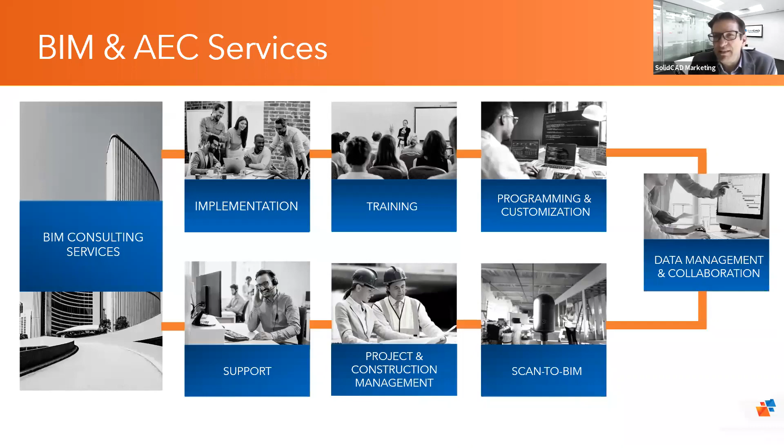Recently we've been awarded, and we're really proud about that, to be named by Autodesk as top service partner—not in Canada, not in North America, but worldwide. We're trying to do our best to offer you the best services you can have, and we also support our solutions, so we're there to help if you have any needs or problems using the product.

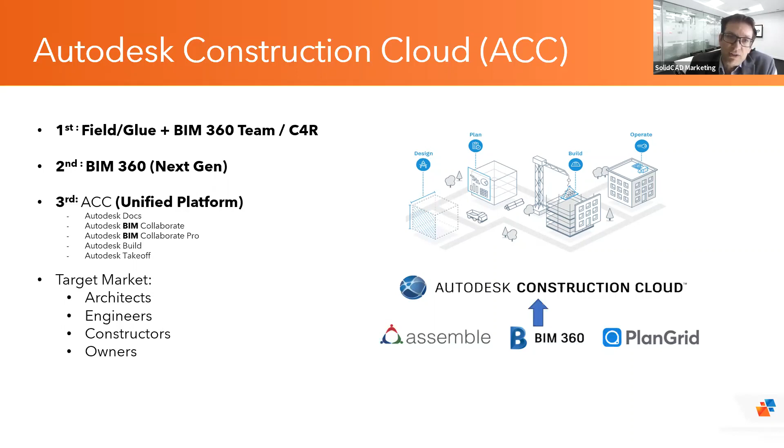So you had BIM 360 Design, which a lot of people know and use, Coordination, BIM 360 Docs, and also BIM 360 Build. That was a great product, however most people found it a little hard to use. That's why today you have a new platform that integrates other technologies Autodesk purchased approximately 2 years ago, an investment of a few billion dollars.

They acquired Assemble and also PlanGrid, and merged those technologies inside one platform they now call Autodesk Construction Cloud, or ACC. Today I'm going to talk about Autodesk Docs, BIM Collaborate, Collaborate Pro, Build, and also Takeoff. Docs is the same as BIM 360 Docs. Collaborate and Collaborate Pro are like BIM 360 Design and Coordinate. Previously we were very present in the target market of architects and engineers, but now we have a very good solution for constructors and also for building owners.

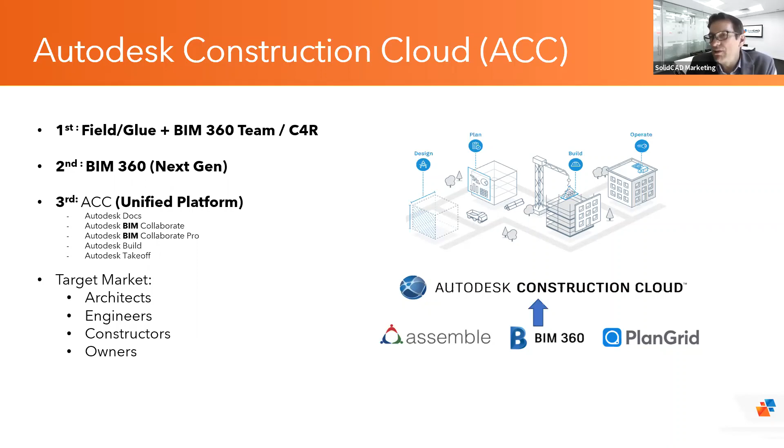Some changes happened in February: if you subscribe to an AEC collection, you now have access to both BIM 360 Docs and Autodesk Docs. It's free of charge, included, and you can use it right now. And if you were a BIM 360 Design subscriber, it now includes Coordinate free of charge—usually it used to be an optional solution.

Also, if you have not noticed and not used those solutions, we do have an integration with Revit and also Navisworks. I'll cover the features that you have with issues that will be widely used inside of the platform, but there's an integration where you create an issue inside of the platform where you can connect inside of Navisworks and connect inside of Revit.

For those who are not aware, if you're using BIM 360 Design or now Collaborate Pro, it's the environment where you work on the project inside of Revit, and everything that you save is automatically published inside of the cloud and then accessible to other stakeholders or other people working on the project who do not use Revit or maybe Navisworks. The same goes with Navisworks, where you can retrieve the project and do more analysis, clash analysis, and have access to more tools than what you can get in the cloud, but those two solutions work all together.

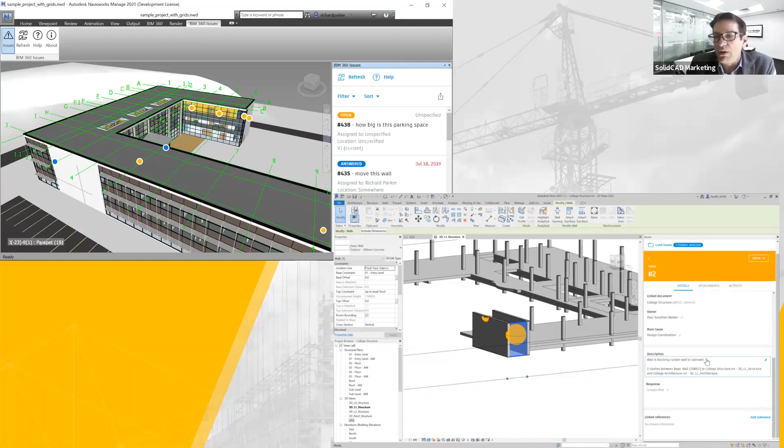So today I'll spend most of my time talking about project management, quality, and safety. I'll cover RFIs, submittals, meetings, all the aspects of a punch list and accessibility of information in the field. Also cover doc controlling, versioning, and approval.

There is inside of Build another module which is called cost management. That would take a little bit too much time today to cover because we would need at least 1 hour. We don't have that today, but stay tuned. There will probably be other seminars soon to cover this aspect.

So why use Docs? Docs is to avoid information in silos. Everyone is using great products—could be emails, could be PDF, could be a tool to view Revit files or use Revit files with Revit. All great tools, but they are all disconnected.

Using products such as Docs will help you create what we call a CDE, a common data environment, where all the information that you want for your project resides, and you create a structure where everyone you want to have access to the data can have access to it, can view the documentation. If it's a 2D model, a 3D model, a PDF, an Office document, you can view all of that information, and you always have access to the latest version.

One question I get very often is, can I control that data? Yes, you can download the information, and there's a free tool called the desktop connector that can help you synchronize the data to another desktop—it could be your server or anything else.

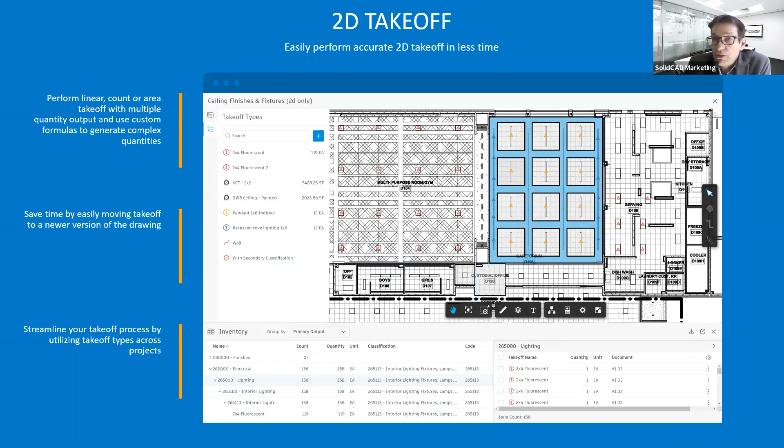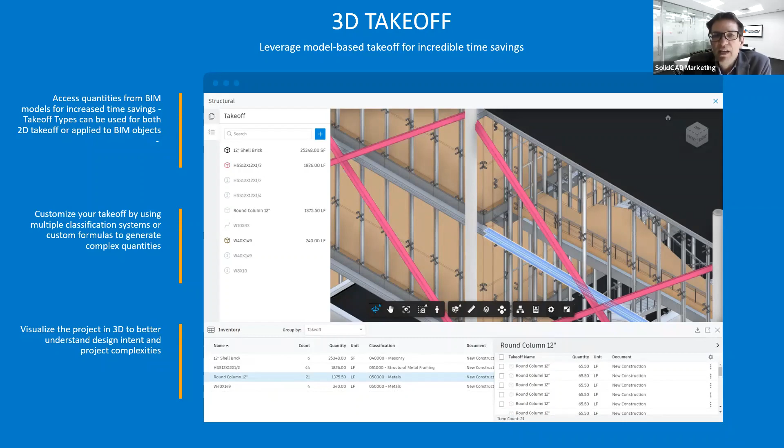We don't have enough time today to review the solution, but if you have some estimators, this is a great tool to do 2D and 3D takeoff. You can use the tool to take a 2D model, a 2D file, extract all the data and do your estimation—that's a great tool for doing that. You can also do this on a 3D model, so as people are working on the project inside of Revit, you can do your estimation at the same time and retrieve all the information of the quantity and get the pricing of the item that you need or the right length. You can use mathematical equations to extract the data and get reports. So stay tuned, there will be another presentation soon about that.

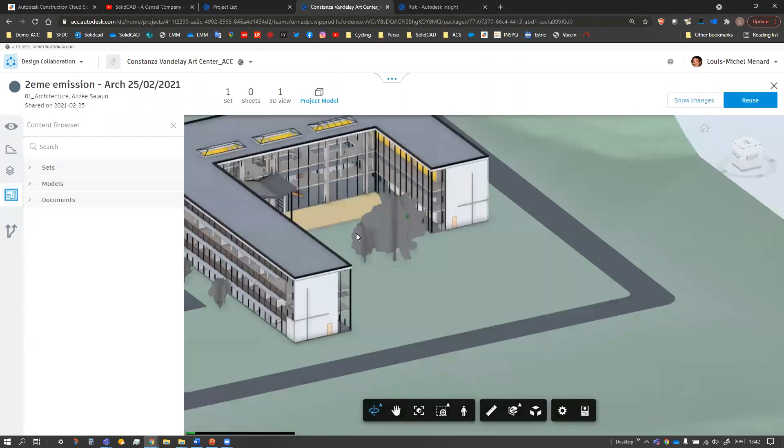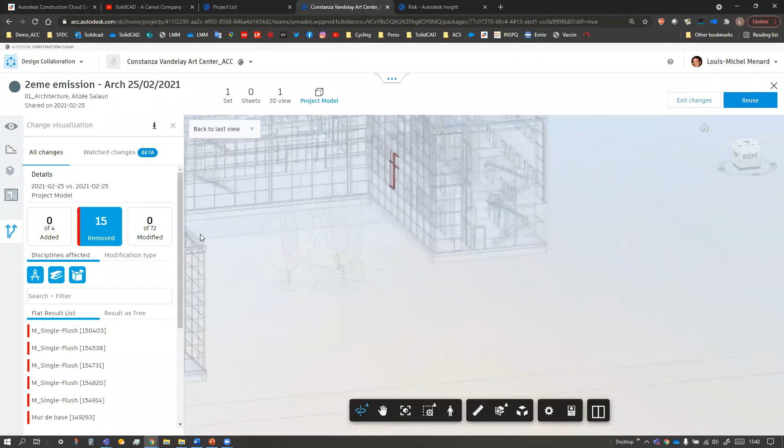Before accepting, I ask, show me the different changes, and then I can review those changes. So I just want to remove those and show you what has been added. You can see in green what has been added, what has been removed. I don't want to spend too much time on whether it's good or not, but just want to show you the type of work people who will analyze this will do. So let's say everything is fine with me.

I click reuse, and then this information becomes available inside of Docs, and it's available to all the other stakeholders and participants inside of a project. So you see that folder called BIM collaboration. You recognize those 4 disciplines. So under architecture, I'll find the model that we were reviewing.

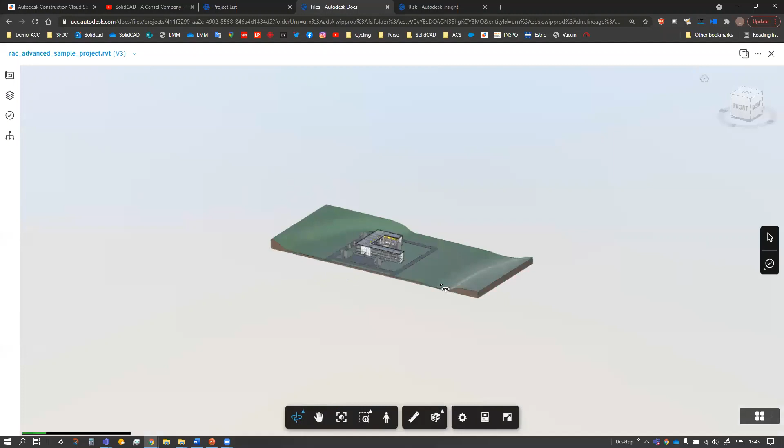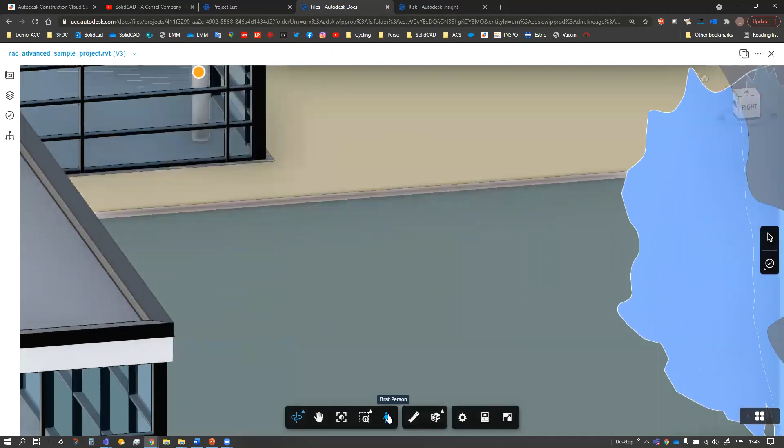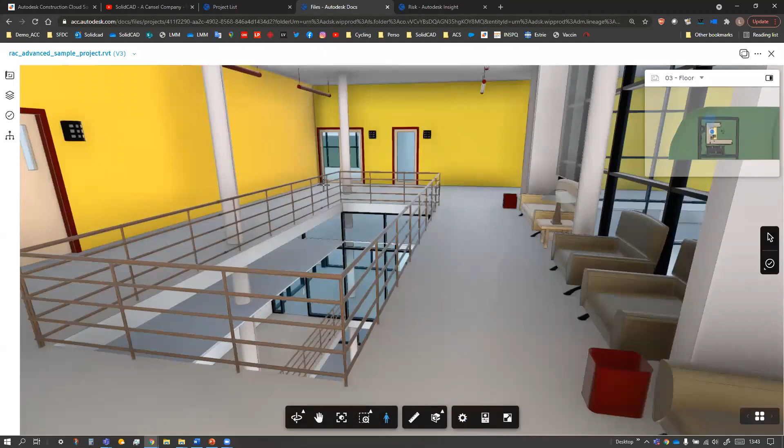I'll be able to do multiple things, like just remove this. You can take measurements, you can do a walkthrough, you can go inside and do some review. So, move inside. Because I don't use Revit, I want to have access to all the necessary information, and I can change from one level to another. Let's go to the 3rd floor and walk through, and I have access to all the properties and information of the model. I do have also a comparing tool.

It's exactly the same tool that I just showed previously. Again, I'm not using BIM collaboration now, I'm using Docs to be able to do that. So just want to close this and also go back to the new feature available with design collaboration, which is model coordination.

A lot of people are using Navisworks right now to be able to analyze clashes, but you can do that inside of the cloud. Just want to remove one model here to simplify the view. As people are working inside of Revit, they are saving their data in the cloud, and automatically the system will recognize all the clashes and potential problems. Like I mentioned earlier, it's not as data rich, and you won't find all the features you have in Navisworks, but it's a good way to start and do some analysis of the clashes.

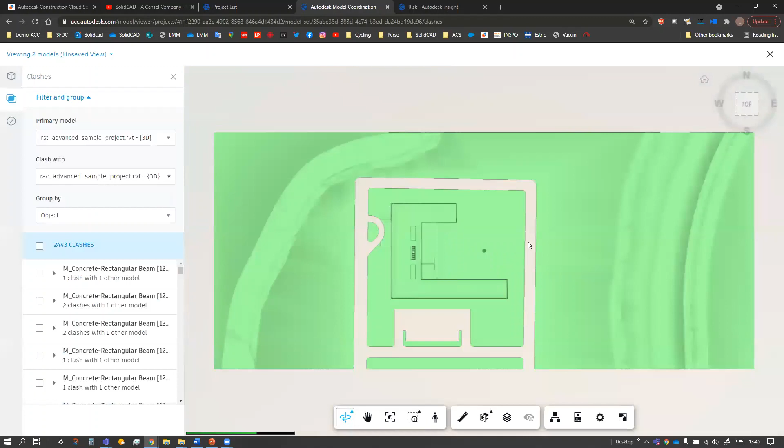So I do have 2 models compared to each other, so I can see I do have some clashes. I'm clicking on that section to request a view of all of those clashes, and they are present there, and I can select them all, or I can just select one or the other. So I just want to focus on this one.

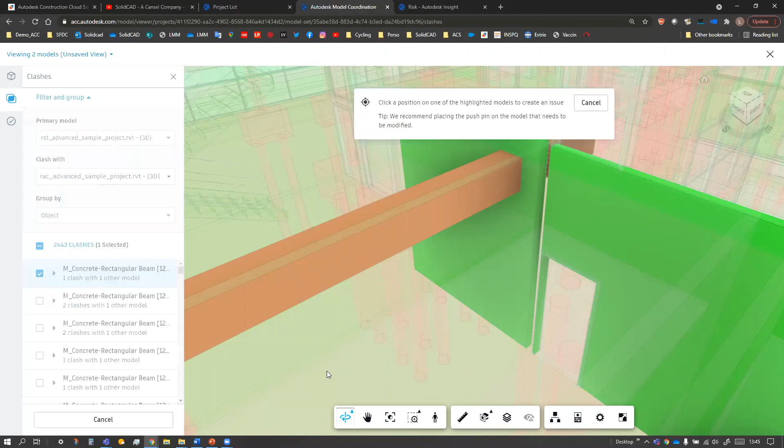Let's say this is not a real clash, I don't really care about it, so I can say it's not an issue. But I can say there's a big problem, and I'd like to assign that issue to someone. So I click on the model at the place where I recognize an issue, and I want to spend a little time creating an issue, because this is something available all across the platform, and it's going to be widely used. It could be either in the field or in any of the other modules where you want to collaborate and communicate about problems or give tasks to others.

In this case it's a clash issue, so automatically it recognizes a coordination problem, but I can switch to another type of problem. Everything you see under that drop list is fully configurable. I can change the name, just created by default, and then I assign that issue to someone inside of the project. Once I assign it to this person, they will receive an email or notification throughout the system that there is a problem that needs to be solved.

Then if I put more details like a due date or a start date, and all the necessary information about the project, like for example the root cause—this is again fully configurable—but the richer the information inside that issue, the better it will show up inside the report, and it's going to help you recognize inside a project who is responding to the problem or who is resolving the problem, or if they are not done on time.

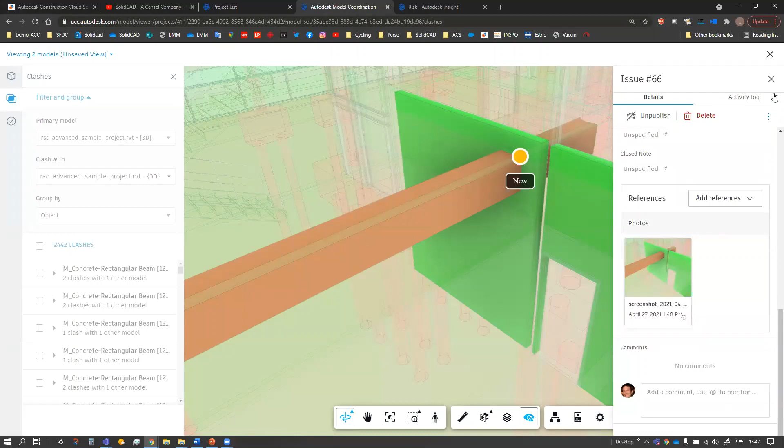You can also add other references that I will review later in the presentation, like photos, files, RFI, or maybe assets. And there's an automatic picture taken when I created that issue. I wanted to take a little time now because I'll avoid taking more time later, and you're going to understand more about this feature-rich item that I'll explain inside of Build. So let's go back inside of Build.

This is the main page, and people who used PlanGrid in the past will recognize some of the features, because as I mentioned earlier, this is a merge between BIM 360 and PlanGrid. So if you know both platforms, you will recognize some of the features in both solutions.

Here is your project. You have some milestones, which you can edit. I put just percentages so you can see where you are in time. You get access to the sheets that I will demonstrate in the next few minutes, and also you have access to your work. As you can see, not responding very well to the issues or RFIs, I'm late on them, so that helps me find where I can have problems.

It can also show you who is connected on their mobile device. Ian is not up to date, so I can send him a reminder to make sure that on his mobile device he's having the latest information. And here you have all the most recent activities, so you can see the picture that I just took with the issue. So let's go on Sheets.

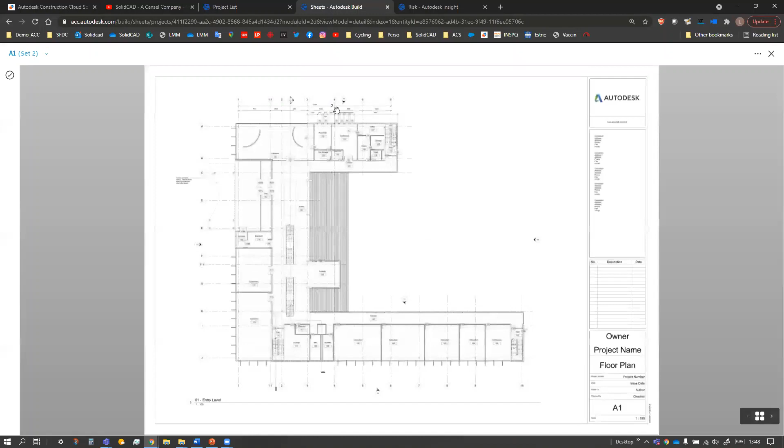On Sheets, those are the official drawings that you want to make sure are used in the field. You're going to have files here that we'll cover just after that, but those are the official documents, PDF documents where people can do annotations with a mobile device. I just want to show you some of the features available on the Rich client, but those are the same tools that will be available under the PlanGrid app that I will show a little bit later.

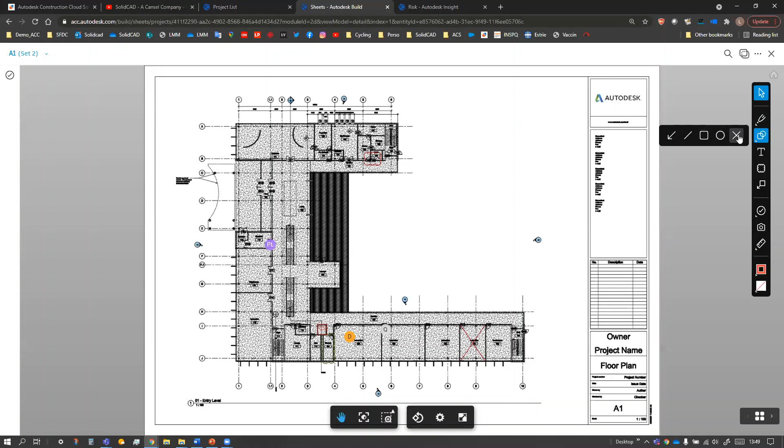Some of the features PlanGrid users will know: you have tools to do some markup, using arrows or geometry, put some links on them, add text, clouds. Just want to show you one example. Let me zoom in here so it's a little easier to view.

You have a box there so you can publish or not the information. Then you modify the text, change the color, font size, border—you can change everything. You can also add more links, related to another sheet, another file, an RFI, or a form. That can be very easy when people are accessing a document, so they can have access by clicking on the drawing to other documents, like a form that I will show later.

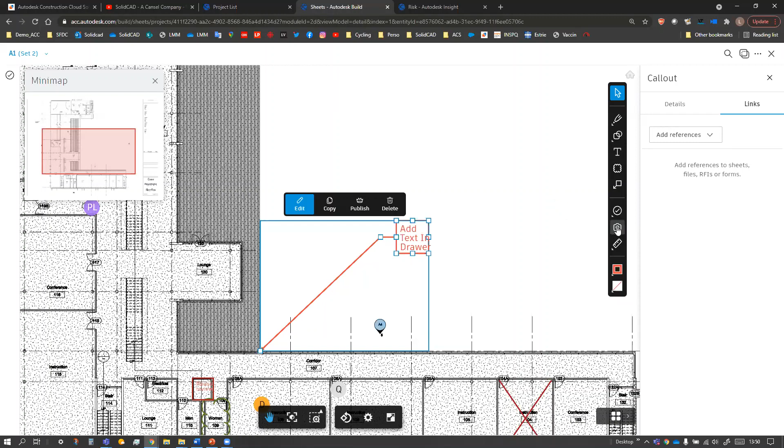There's also the possibility to create pictures. So if I want to, in a specific area, take a picture and show where it is on the drawing, I put it there, and then I can add an existing picture in the system, or if I'm using my mobile device, add a picture from the place where I am at that point.

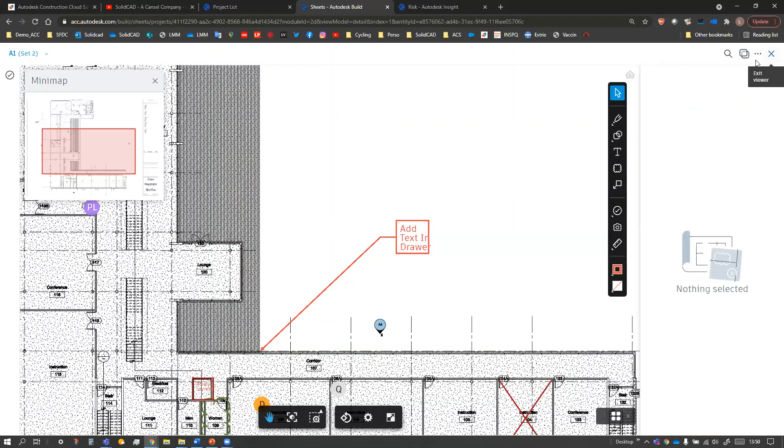Just want to change the view. Also, another great tool—let me remove this—is the compare tool that I showed earlier in the 3D model. It's also available for 2D drawings. I just want to compare these two drawings and show you the differences.

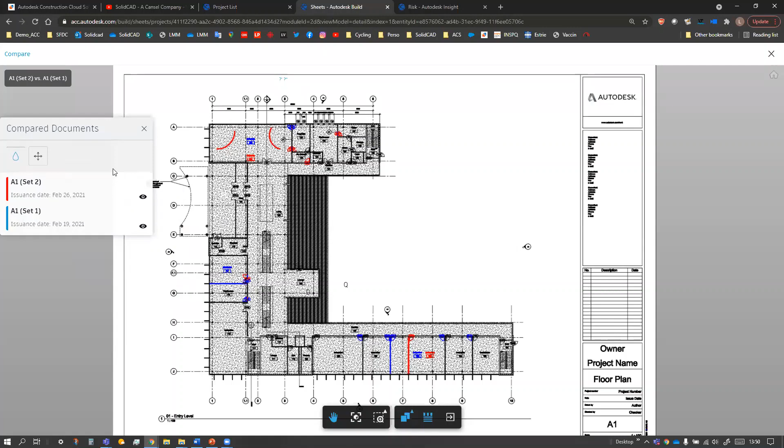We have two versions, Set 2 and Set 1—you can call them the way you want, it could be R1 or R2. You see in red those changes that have been removed to the second version of the drawing, or in blue, you can see what changed or moved from the previous version.

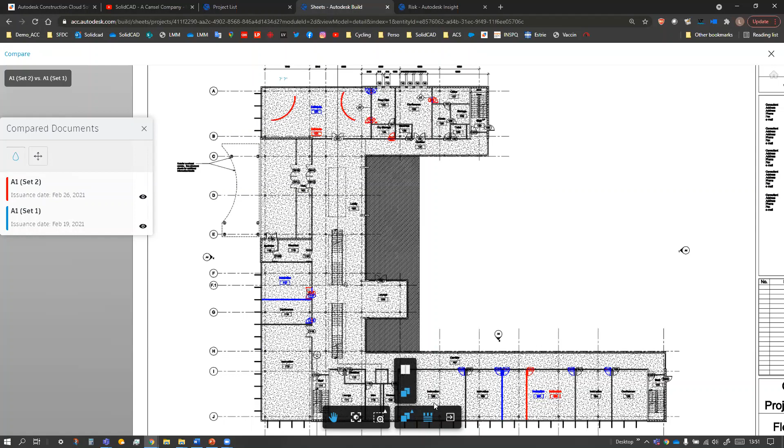There's another way to look at the information. You can change this and move the bar. So you have a blue line there, and by moving it, you notice the curved wall disappearing, and here a partition or wall that is available or disappears. You can also pan the drawing to see the changes that happen inside that document, and you can do that with the mobile device, which I'll show later.

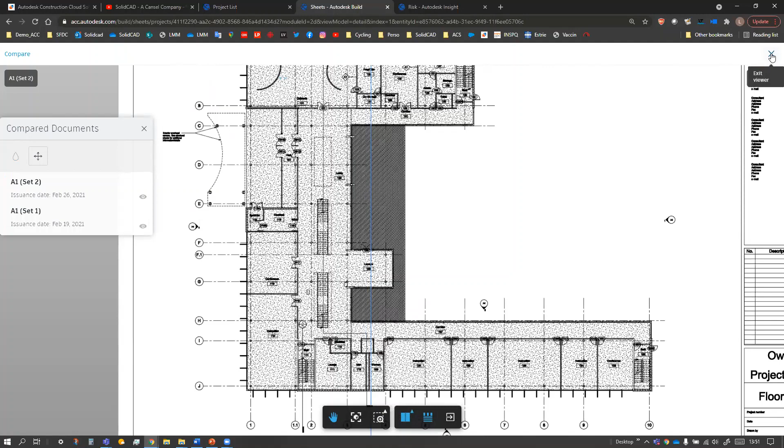Also, when you add other sheets, those are PDFs, but it's going to automatically extract all the sheets inside one PDF. In this example, I uploaded one document that included 8 sheets, and it automatically recognized the A1 and the floor plan. If it doesn't, I have tools during upload to force the system to recognize a specific section of the drawing, then automate the system so it always recognizes the right sheet number and the right name or information I want.

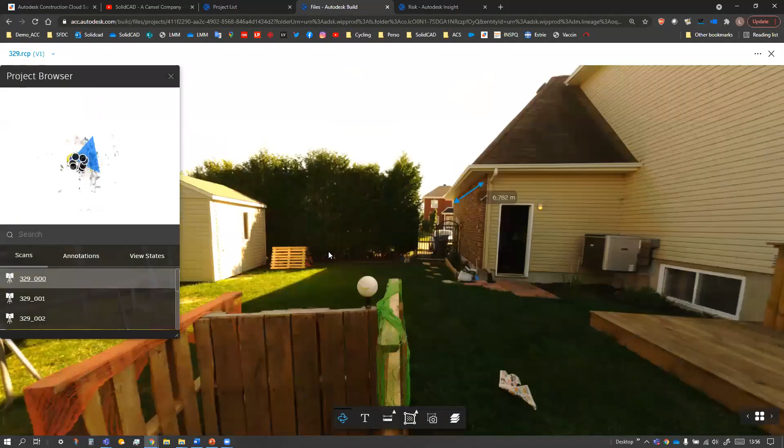If you do some 3D scanning project, you can put your project over there. In this case, I believe I have 3 different scans. It's only the photo, of course, because if it's the point cloud, it's going to be very heavy. But still, you can take some measurements, put visibility on or off, delete, and have access to other features.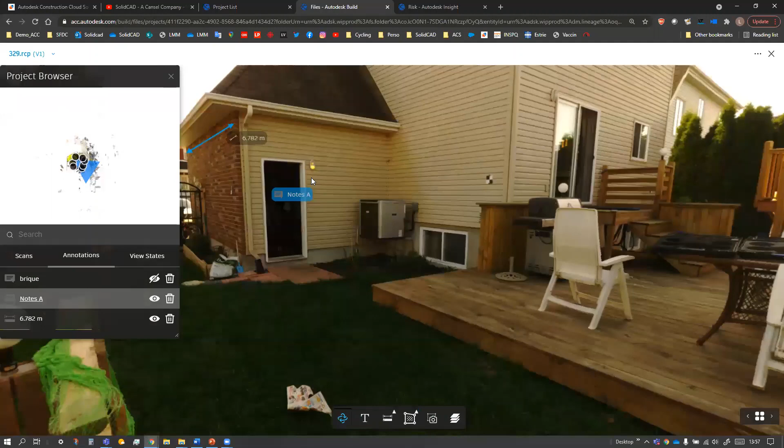Just want to show you some other examples, some notes. At the bottom you have different possibilities like putting text, notes, measurement, and everything over a 3D scan. It's a great feature, something that was requested a lot for helping communication between people on a project.

We went over issues, so I want to show you all the issues done inside of this specific project, so you can see what status they are in. It's very important to put as much information as possible when you create them. You can force some fields, but sometimes if it's not done well, you don't have all the details of what has been done or not.

You can filter here and see which category of issues they are in or which type it is, so you can filter and, having a little less information, drill down on who is responding or not.

This is very important because you also have another module called Insight. Insight is available here with any subscription of the solution. It really helps the stakeholder or project manager see where they have problems. It's a machine learning system, so it learns about the text included in the notes exchanged.

But also, if you have incomplete documentation or overdue issues, you want to see them, so you'll be able to filter where the problems are. In this case we have all those issues, so you see 11 documents not completed, and you can review who is not doing it. You can see the date, which can be very useful when following up on your project. So it's very important to enter the documentation, and this will be listed inside the report as well.

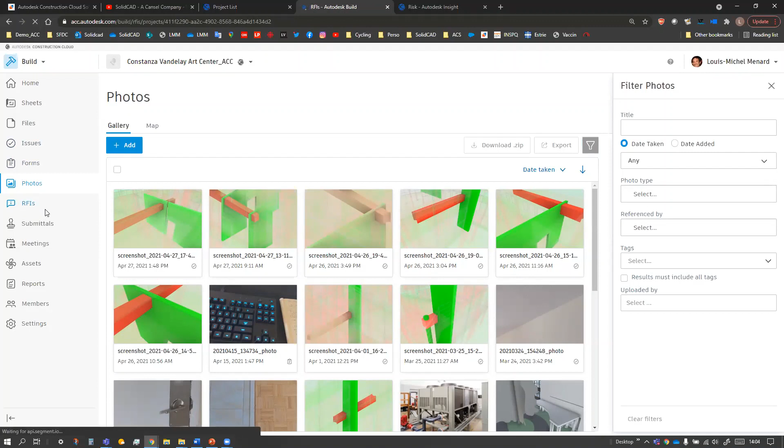Now the RFI, which is the process to request information. I've created 4 different RFIs here. They're all different but they're all the same — I just want to show you the different statuses. When you create an RFI, it's in draft mode, then it's open and in review, then answered, and then closed. I just want to show you the settings so you'll understand a bit more.

First, you set the permissions — for the people working on the project, you determine if they're a creator, a manager, a reviewer, etc. You also have the workflow, and there are 2 different workflows: one with a single reviewer, or with multiple reviewers.

I won't go over the whole process again, but you can see the creator created it, and the creator closes it once satisfied with the answer.

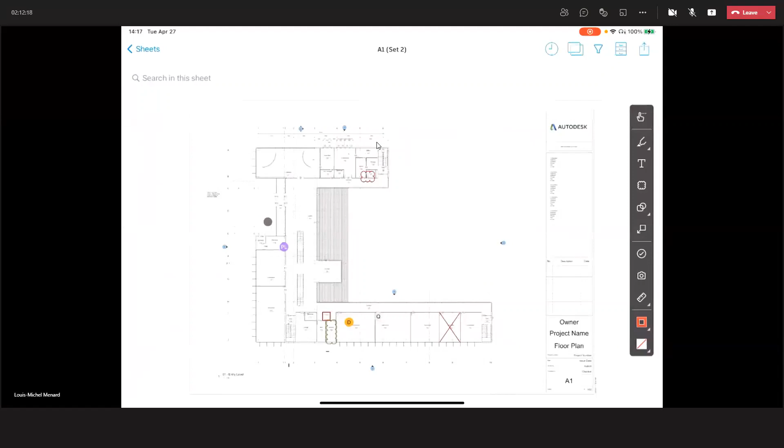Under sheets, you can see all of your drawings. I don't want to go back on the same feature I just showed you, but you just pinch the drawing and you can see very clearly where you are in the document, shown on the top left corner. Here on the right, you have the same tools I showed you previously, and then you have files, which are for the field documents we just reviewed.

One of the key aspects of PlanGrid now integrated is the rapid reviewing of PDF documents. It's very, very quick. People really like to have access to large PDF documents, and once it's there, it refreshes very quickly. That makes a huge difference between different platforms.

So we reviewed the form. I just want to go back to the form we saw previously to show you how easy it is. If you want to enter information, I'm just using my finger to select the right answer to specific questions. My apologies, it's in French. You can have a date picker, a signature - we saw that already, but now I'm doing it on a mobile, so it's very easy.

It's very similar to what I just presented. The other type of form, again, you have the temperature, the weather of the day, which will be filled automatically. Same question we saw - I'm using my fingers to review this, enter information, and so on. I don't want to go back over all the details of the form again, but this is how it's presented to the person in the field who may have 10 or 15 forms to fill across the day.